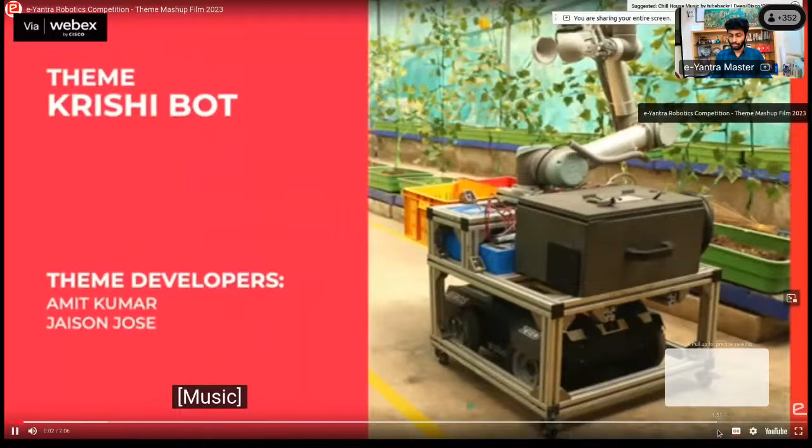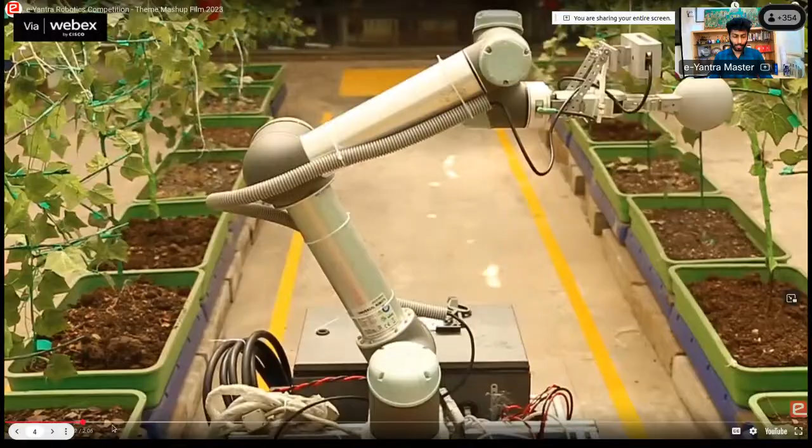I will show you a mashup film. I'm not sharing the audio, but I will explain you step by step. This is a Krishi bot theme wherein students have to pluck fruits in a greenhouse environment, and then simulate it at the same time. They were given remote access. This one is a drawing robot, but it can move in any direction because of the holonomic wheel.

Then comes the drone theme, wherein a drone was shipped to students and they had to geolocate this particular yellow block and all the obstacles on the scene, sharing coordinates with respect to latitude and longitude. That was like a GNSS as well as drone combination theme.

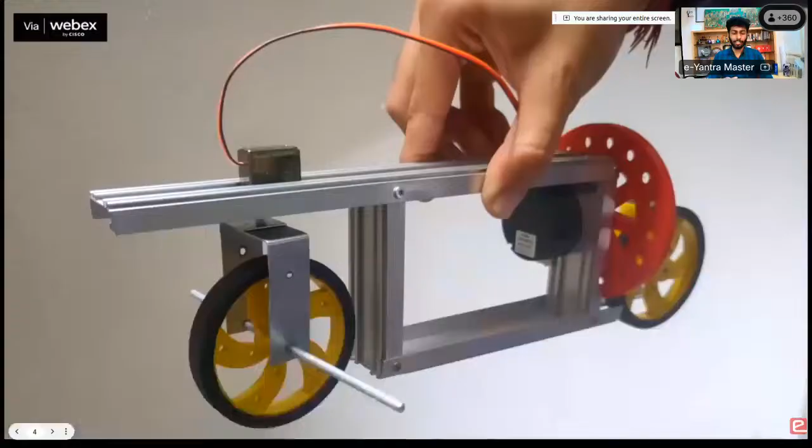Then comes a delivery bike, wherein a control system is used - a self-balancing bot made using any design, with freedom of design given to the students. Then comes Swachhta bot, which uses FPGA, so you will be learning more about field programmable gate arrays. Then comes functional robot, where functional programming is used, and at the same time you solve tasks like pick and place, and algorithms to find the shortest path.

The prizes after the robotics competition include, of course, a certificate of various levels based upon which task you were able to complete, then cash prize, goodies, and an 8-week paid internship. Those selected after some interview rounds will be able to come to IIT Bombay and do the internship, and we will be paying you.

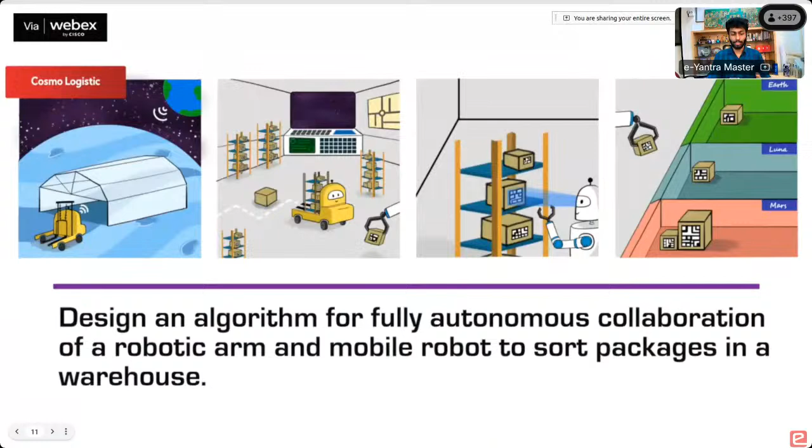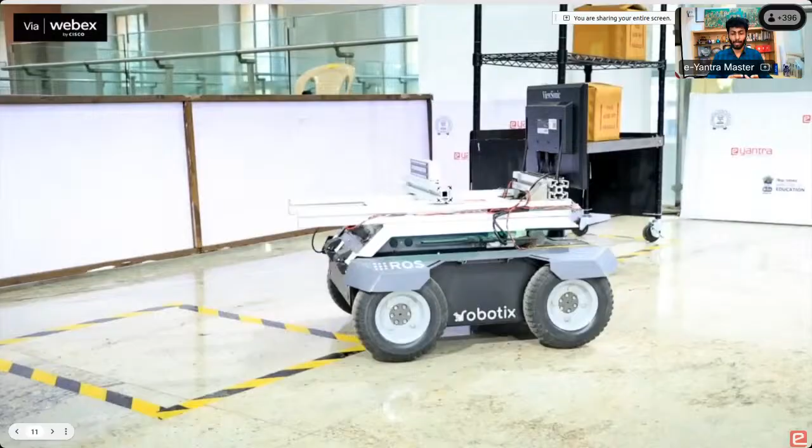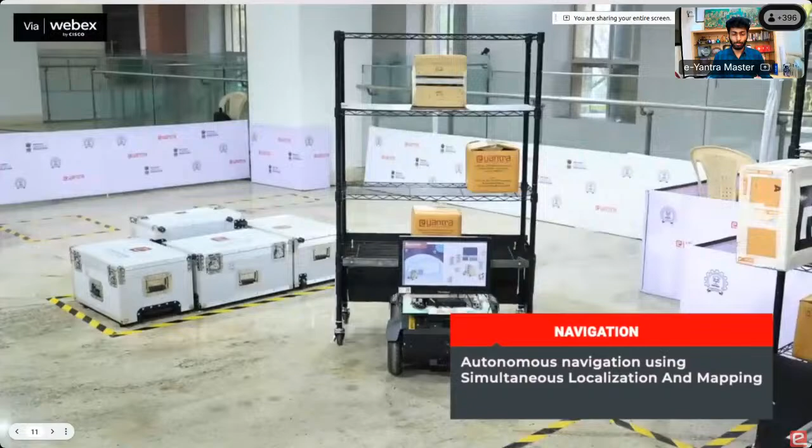These boxes are brought by the rover, which is moving here and there. You can see the rover attaches to the rack, and the rover's duty is to bring the rack in front of the arm. A parallel thing is going on. First you learn in simulation, then we'll give you remote access to do the same in hardware. You can see the docking part, and of course the manipulator needs to know that the robot has docked in front. Only then can it go into the next step of picking the boxes and dropping them.

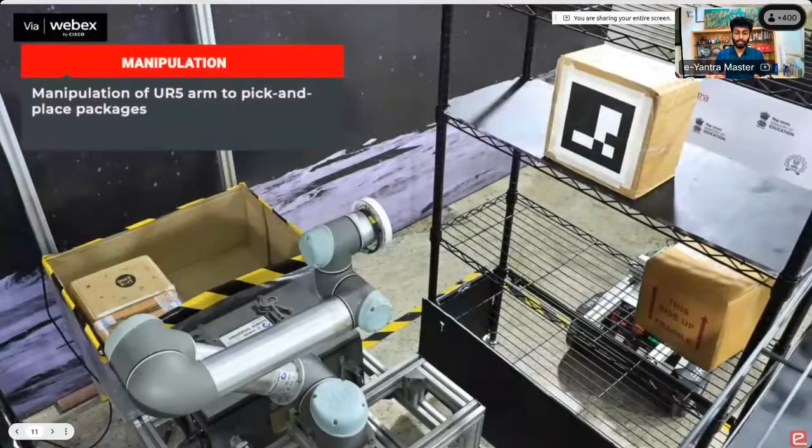That is where this inter-robot communication or multi-robot platform, provided by ROS, is very helpful. You need not learn more about networking and script management and everything - ROS will take care of that. You only need to focus on the algorithm.

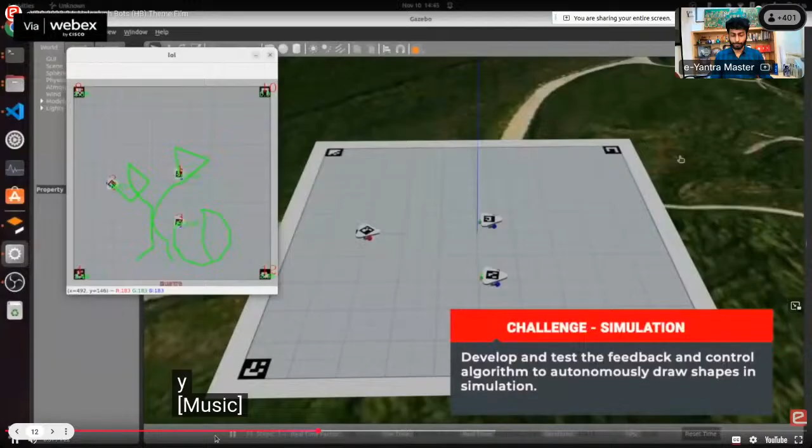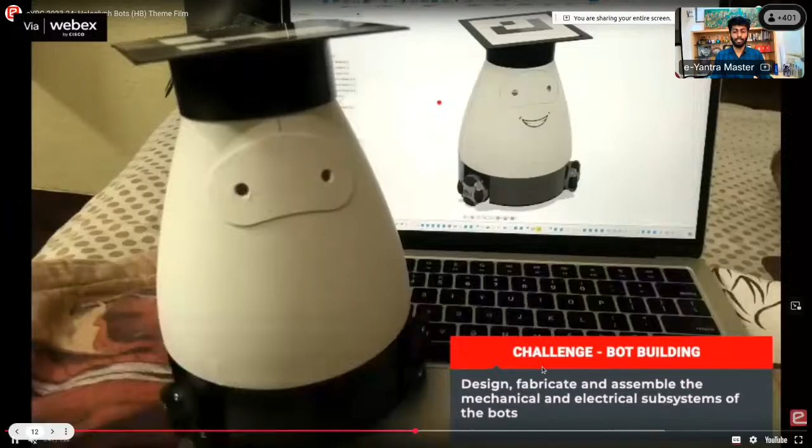Similarly, in another theme which you might have seen in the introduction, that was the hologlyph bot. Here you can see multiple robots are there, and you need to draw a pattern and everything. This communication between each robot, and what actuation to take care of - you can majorly focus on the algorithm, and the rest of the communication is taken care of by ROS.

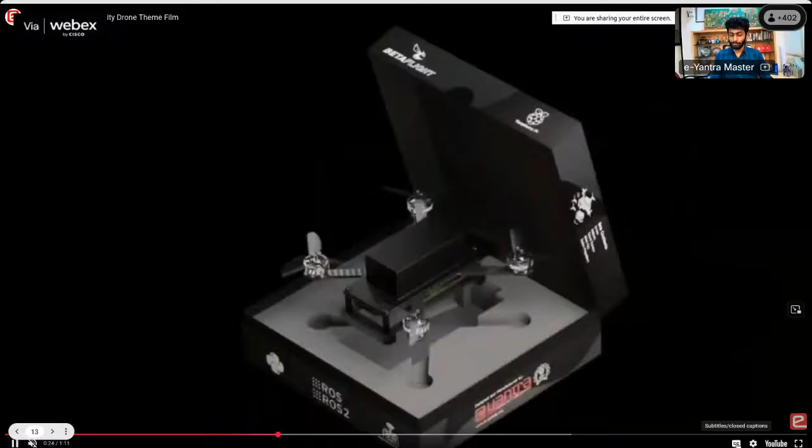Then comes luminosity drone. Especially in the case of drones, to send communication data and everything, ROS is very helpful. In this theme, they had to identify an alien based object using an IR camera, then locate it and give it as a topic or message to the computer saying this is where I located it. And of course you need to learn all the control system thing. This is a beautiful platform - you need not tweak around for each drone's parameters and everything. Rather, the platform is ready. When integrated with ROS, you can directly start tuning it and trying out your algorithm based upon where to go, how to plan the path, and everything.

So I guess you have got an idea of why ROS is needed. Now, to cover it in a different aspect - why learn this? Because it's an industry standard, so many industries use this. Even though they use the concept of ROS, it's like the best thing for prototyping.

So if you want to suddenly create a particular robot and make sure your prototype idea is a proof of concept ready, for example, you decided to make a robot which does vacuum cleaning in your house. You have an idea of how to improve the vacuum cleaning part, but you're not interested in going into detail of how to do mapping, localization, and navigation inside a room. So you download a package of navigation, put it on your robot, and focus only on that particular part of vacuum cleaning. That way your prototype part is speeded up.

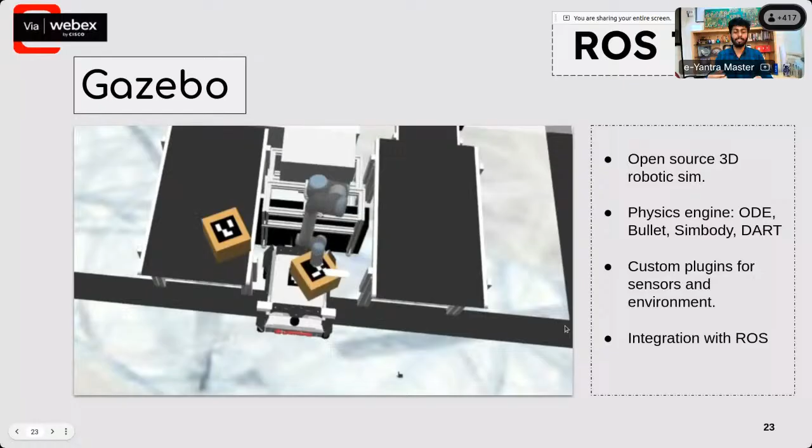Then comes custom plugins. Plugins are something like, if I want to mimic something which is in the real robot but cannot be directly done because the simulation doesn't work that way. For example, I want to pick a fruit. In real hardware this is easy, you just pick it and the object detaches. But in simulation, to mimic that, you need a plugin. You write a plugin, a short code which activates on request and does things based on that request. You attach that plugin to a particular fruit or object, and it activates only when, let's say, you apply some amount of force. If you put enough force, it will detach and attach to your manipulator. That is the role of a plugin. You can also create wind, noise, or even fog-like effects in this simulator.

Now comes the robot visualization tool, RViz. This helps you visualize your robot - for example, which frame of reference you are currently looking at, or if you have located something, how far it is with respect to a particular frame of reference. All that can be done using this visualization tool. It's important for understanding how the sensors are seeing the world.

For example, you attach a camera to a drone, and in the simulation you can see the camera video separately as well as how the drone is moving. But at the same time, you want to know, with respect to the drone, what the camera is looking at and where it is overlapping, and if you've detected something, what coordinate it's at, how far it is, what angle, and all the locations - you can get all this using RViz. You can visualize all kinds of sensor data, even text, numeric, image, or a 3D model inside it. In fact, you can visualize everything using RViz.

For example, you are in a self-driving car and mapping the whole environment. You can create a 3D map itself in this visualization tool, and at the same time see how it is changing or how things are getting connected, if there was a gap in between when you were constructing the map or not.